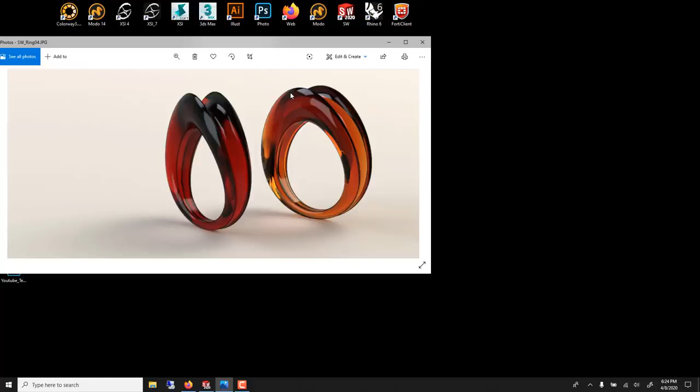In this Solidworks tutorial, I'm going to show you how to model a semi-organic ring using the sweep tool. We'll also learn to use Photoview, the light version of Modo, to do a glass render like this.

File new. If you're making measurements for 3D printing, set units to millimeter here. The trick is to use three separate sketches, two from the top and one from the front or right. Let me show you.

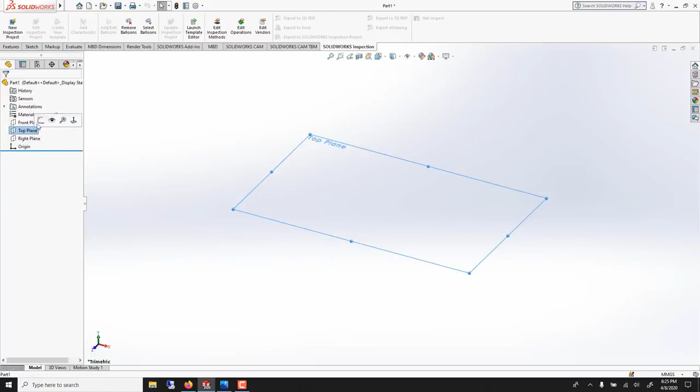Top plane, draw a circle, click here. Exit the sketch. This is your first one. Now draw a new sketch on the same plane, like this.

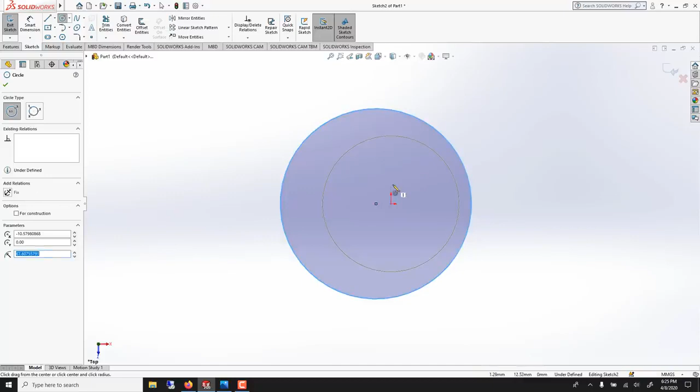Draw a circle, and offset this one. How much, I'm not sure. Something like this. You can always move it back. I think it could go back a little bit. Exit the sketch, middle click and drag. Now we have the two sketches on the top.

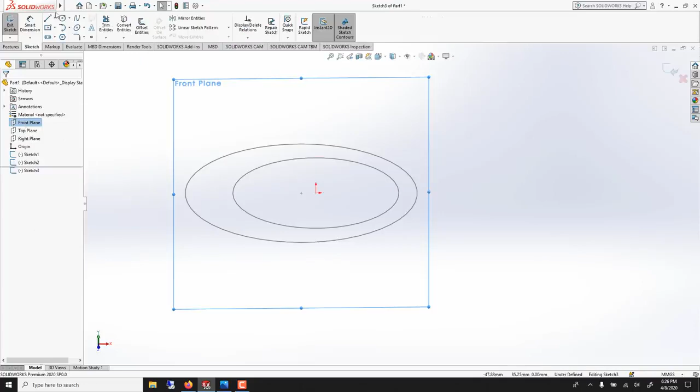Now I'm going to pick the front plane and draw a sketch, a circle. We could go Control 8 for sure. The main thing we want to do here, actually I'm going to remove this to show you.

Delete, that's the coincident relation. We want this, so we're editing this sketch, the small circle. We click here, shift click this one, and do a pierce relation. Pierce is almost like a normal-to relation, it will align them. And we're going to do another one here, but we need a point first.

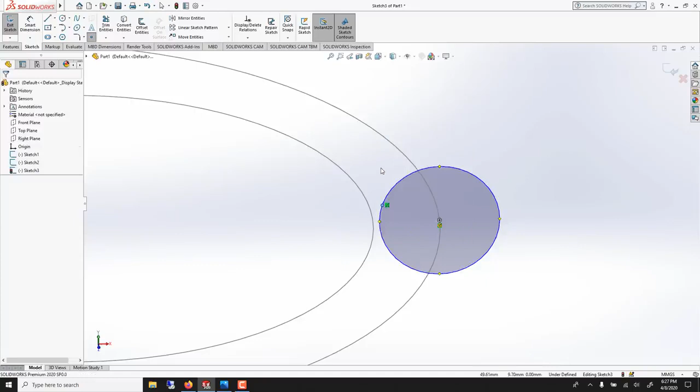So I'm going to put a point there, like this, then select this point, shift click this, and do another pierce. Now they match. So here we could sweep it already, it will work, but I want that ring to be a little more interesting.

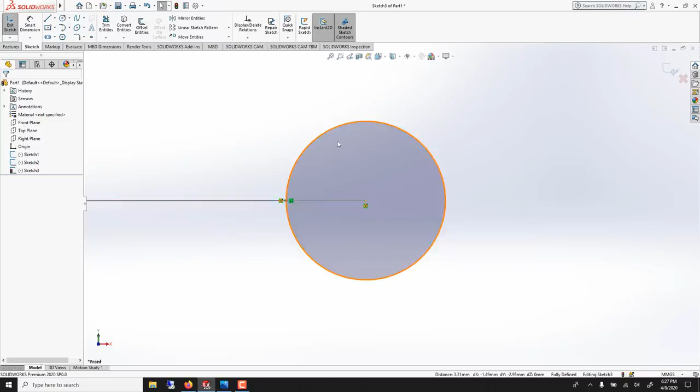So we go Control 8, and we could change the profile here. On the inside it's a bit trickier because it's following a rail, but on the outside you should be able to do quite a few things.

So I'm going to draw a fairly large circle and move it back. And I just realized it's not big enough, so I'll just drag here.

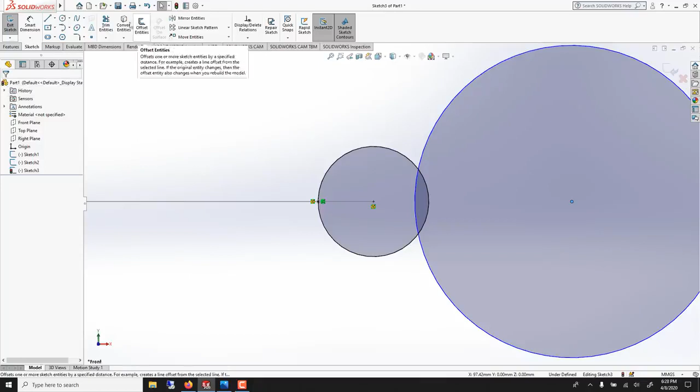Voilà, something like this. Now I'm going to go trim, like this. Perfect. We could put a chamfer or fillet, so I'll go with fillet here. This might be too big, so let's try 1 mil.

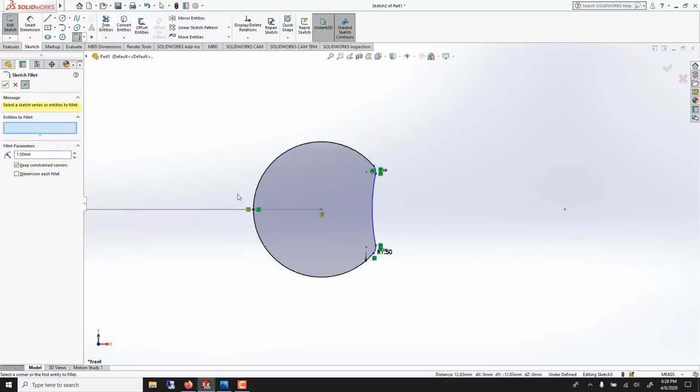And we could go a hair larger, 1.5. Voilà. Exit the sketch. Now we can go under Feature, Sweep, select the cross section, select the path. The outside one should be the first path.

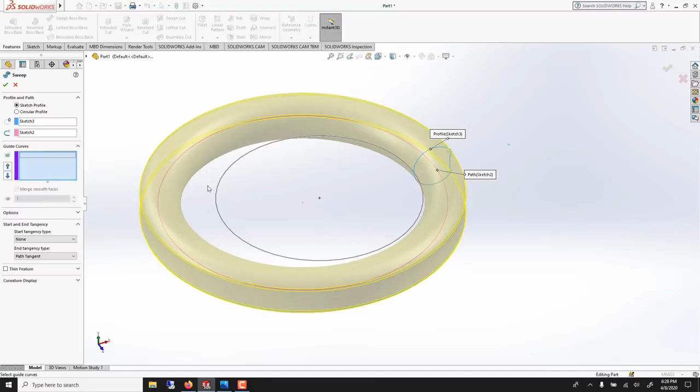And here under Guide Curve we can pick the second one. I'm going to select the top plane. If we want a new plane, I can just go Control Drag, or you could draw on the top plane too. You don't need a new one, it's just to show you.

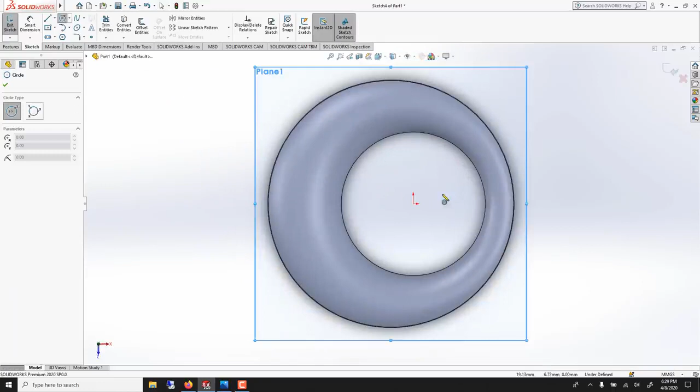In here I'll draw another circle, Control 8 to make it normal too, and I'll do one. Then I'll go Extrude Cut, and say OK.

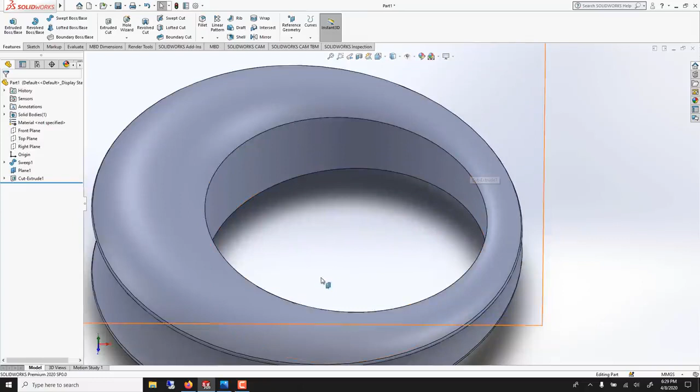Finally, we could also do a sweep cut to remove more, or a 3D fillet like this to smooth out the transition a little bit. I think 10 is too big, we'll go 2 and 2 here. That's going to help us make the glass look like glass.

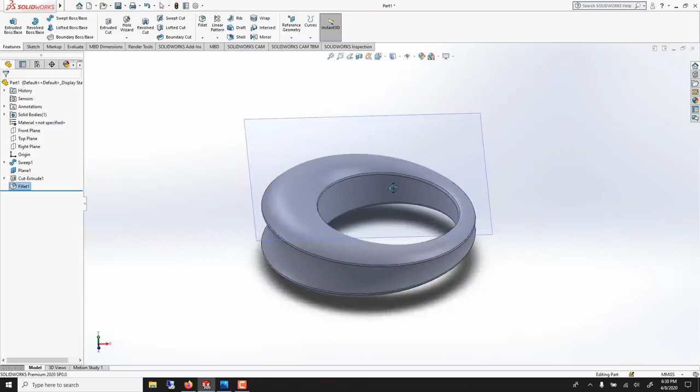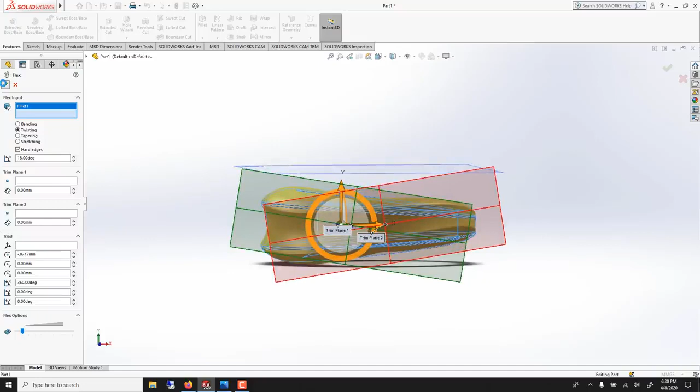What else did I do? I think I twisted it a little bit. I went Insert, Feature, Flex, clicked here, went Twist, and I think I did 18 degrees, just to give it a bit of an organic look. We could move the twist up too.

And I think we're ready for rendering. So we'll make sure this is turned on, Photoview. If not, you go on the add-ins and turn on Photoview.

Once again, Photoview is a small version of Modo. We'll be using this tab quite a bit, and this one also. So the first thing I'm going to do is put on an environment for lighting. This one is pretty good.

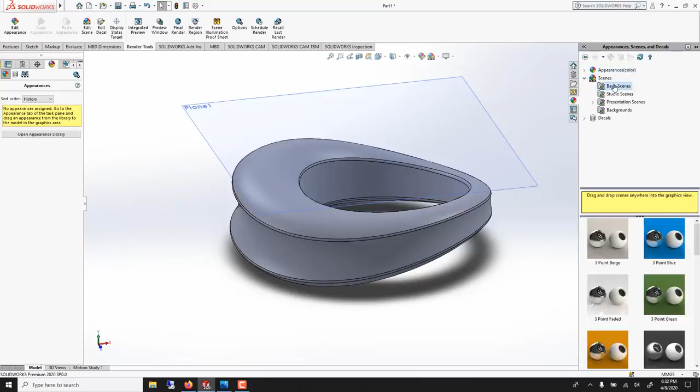So I double click, and now we can see we have a few softboxes that will light, and we have a backdrop here. So that's pretty good, with perspective to fake a camera, so it looks like we have a perspective.

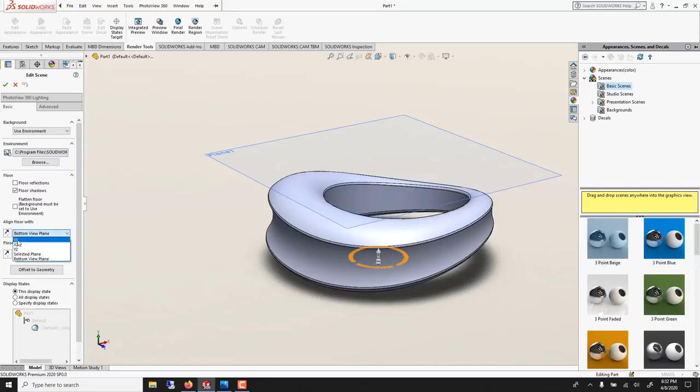What else? We'll go to Edit Scene to tweak our environment. This is where I can trick it and say X, Y, and it will move this up. We could also rotate the ring, I'll show you how to do that too.

Here you could change the highlight, you see where the lights are if you don't like it.

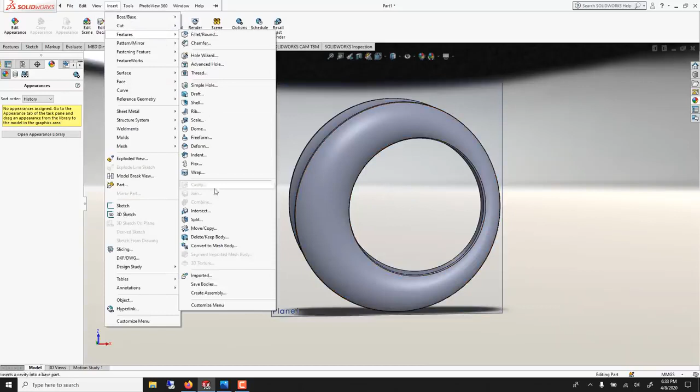And to turn this, a quick way of doing it is Feature, Move, and click here. Make sure you're in, sometimes there's more menu here. This is the default one, and you go Use Translate, and here you could rotate it.

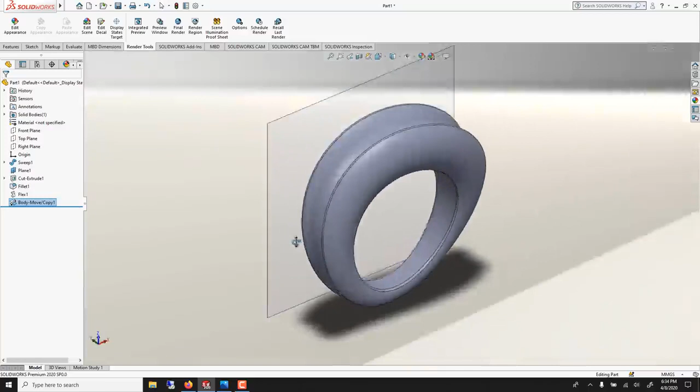Voilà, it's a hair too much, but we'll get it. With this tool, you can also make a copy. So feature, move, and here you can say copy. So now the new one, you get a new one for the same price. And you could do a different rotation on that new one, things like this. So let's find a sweet spot.

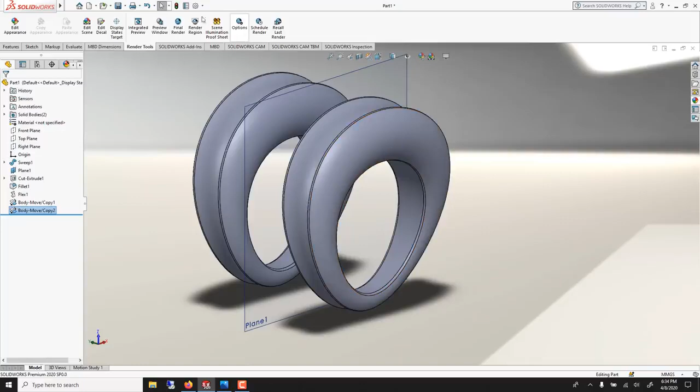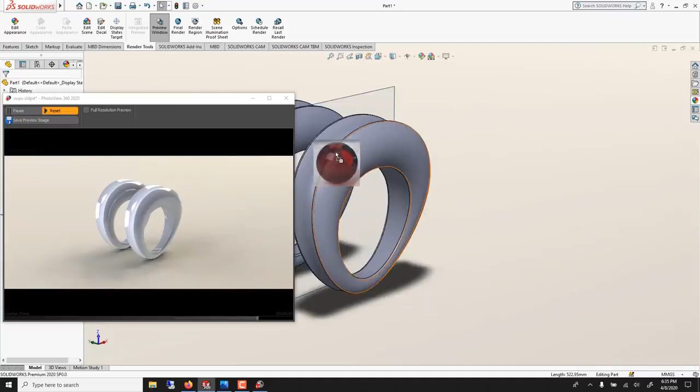So under organic, you have wood, liquid. The liquid are pretty good. Let me show you the red wine. And you can say to the whole body or just the sweep if you want the inside to be different. Here I'll go the whole body. Voila.

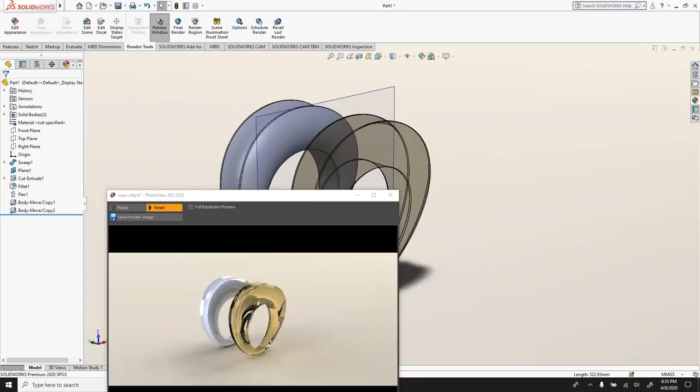And now we can also do one. This one is a bit dark. So let's try another one. And it should replace. If it doesn't, you can go here and remove it.

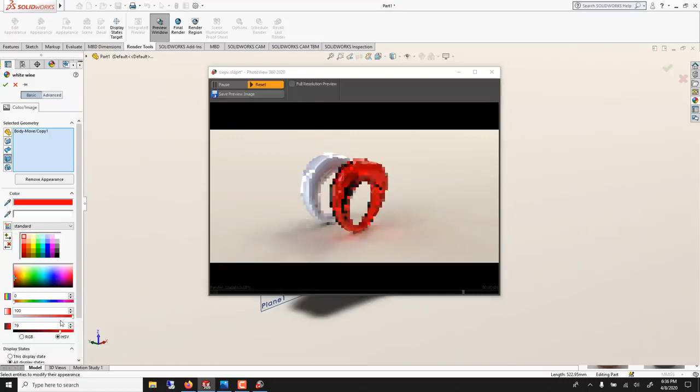Now here you can tell that there's too much refraction. So you can go edit, right click. And you could change the color here. It's as simple as this. So let's make it red. If it's too saturated, you can go here, tune down the saturation and maybe a bit the brightness.

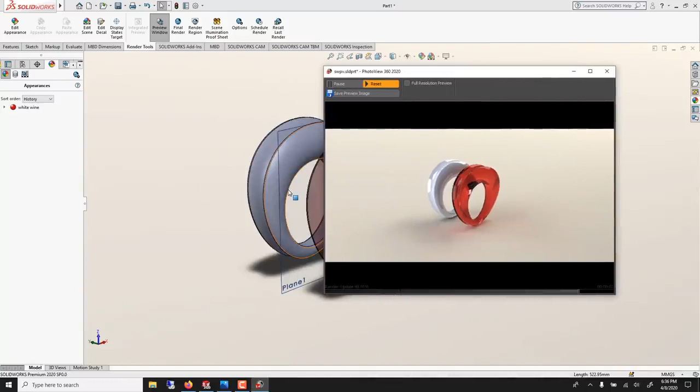And here if we go advanced, illumination, you can change, you see the refraction, I can go maybe 1.2 or 1.5. Here I actually prefer 1.2. And sometimes when I do a ring, I like to have contour, have some little line trace.

So let me put another one. Here we have glass. This is a thick glass, so we can go thick. Another red one. This is more like amber. Very dark.

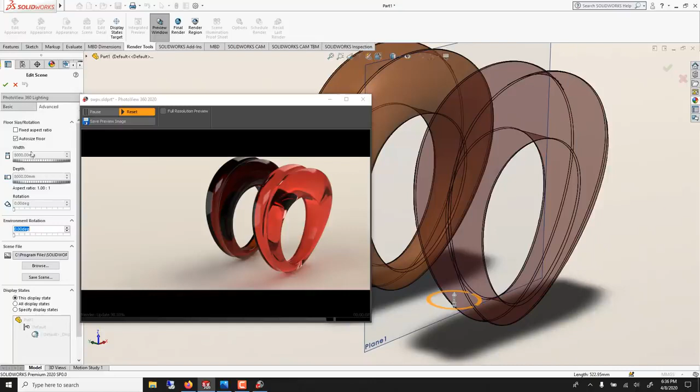So to get more light here, one thing you can do is go back to edit scene. And you could play with the environment here. Turn it, and you might get a light from the side. It's going to give you more.

Like here. And we can also go option, and this is where, make sure this is maximum. This is usually 8, I think. And sometime on the glass, he'll give you, this is mostly for glass, he'll give you black spots. So sometime on thick glass, I would go 12 or more.

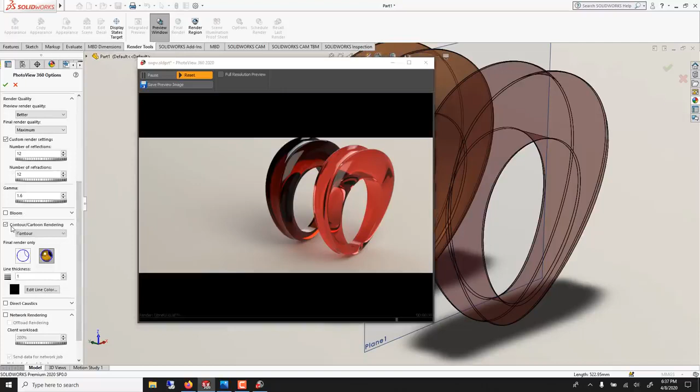If you're going to Modo afterward, if you're going to save this to an LXO, put this at 1.0. Here we can go contour, this one. And now you have to do a final here. Now if you do a final, control middle click to pan, zoom out a little bit.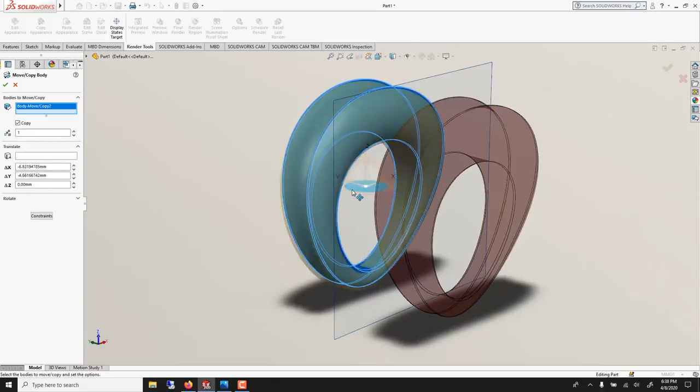If you want to rotate this one more, you can go insert feature, move again, pick this one, and you could rotate just a hair more. Voila. So then we can go final render, and here we'll get the ink.

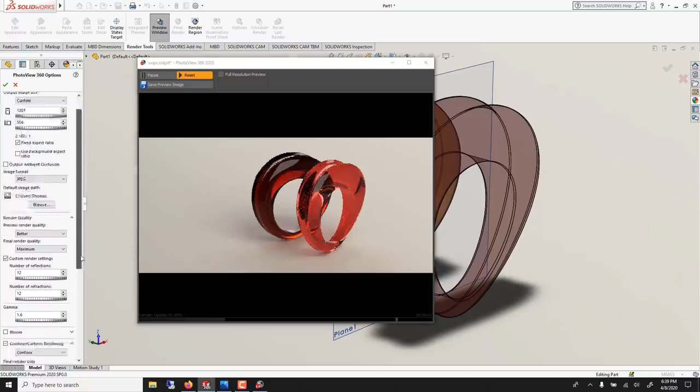So here it rendered the ink only. That's a mistake. Sometimes I do this. It could be you can get very pretty ink. It's when I was on the option. You wanted this one. Voila.

Voila. So now you can go, you could play with the bloom, but I don't think here it's bright enough. If you wanted a glow, you have to go down. You see it's blowing up now here. So here it's not. I use this mostly with metal.

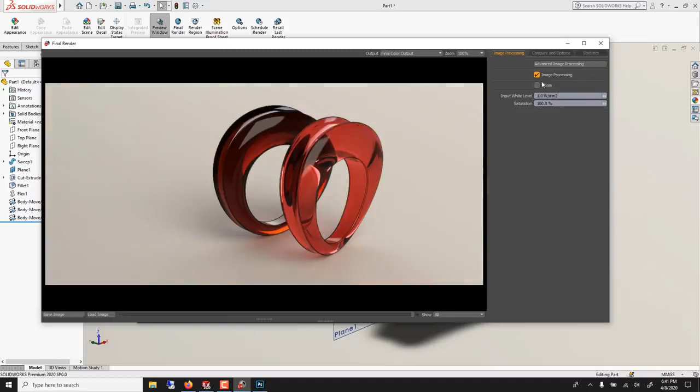And I'll show you a few tricks in Photoshop. We'll go like ring test. And now if I go in Photoshop, I can go image, tone. I use this a lot. Control Shift F to edit fade to just put a little bit of it. This algorithm is actually excellent.

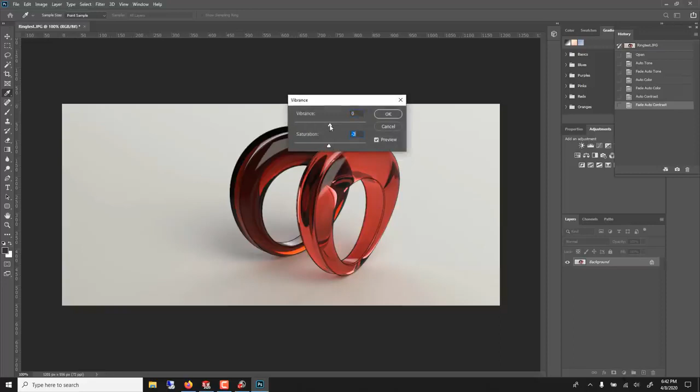10. Then we can do a color. Control Shift F. Then we can do a contrast, just a hair. And if we want, we can even do, often with CG images I remove a bit of saturation, just a hair, and I compensate with the vibrance.

You can also, if there's some dark area like here, go shadow highlight and bring it down a lot, just like a hair, you see. And sometimes I don't think here we need it. I will do also a filter, a blue or yellow, and I'll tune it down a lot. Here yellow could work. And same thing, Control Shift F.

And here we're talking like just a grain of salt. So you see I open, it was like this, and now it's like this. Here I prefer this one. Sometimes I color correct a lot and I go back and the beginning is actually nicer.